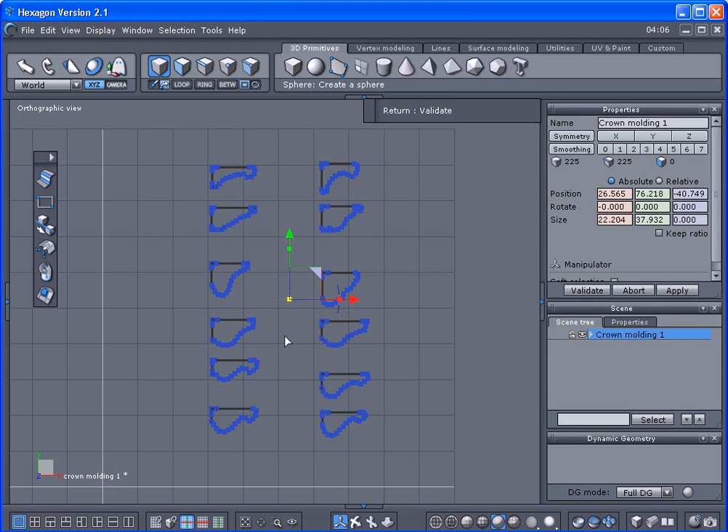What I have here is some 2D profile shapes of pieces of trim. As you can see, I've got some profile shapes made with the 2D line, and this is called crown molding, which is a piece of trim.

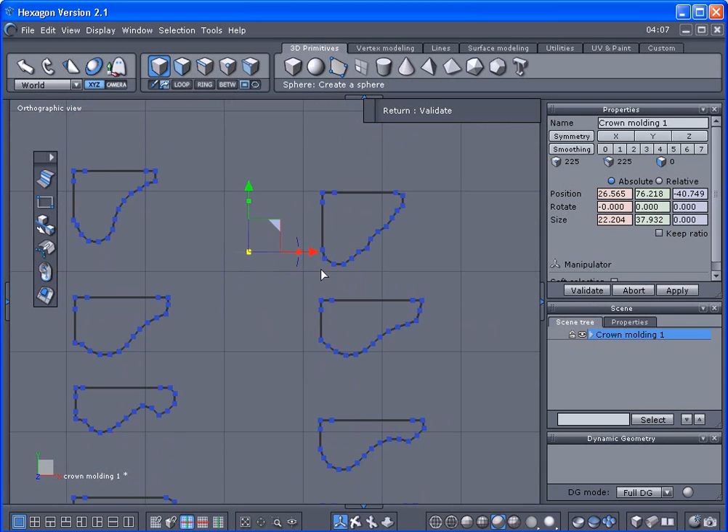Alright, I'm going to start off a little slow here and show you how these were kind of made. Then we're going to get into some fundamental stuff here in a little bit.

As anybody knows, crown molding is a piece of wood, and these are made from profile shapes of pieces of wood. Now these were not just slapped together. These profile shapes come off a blueprint.

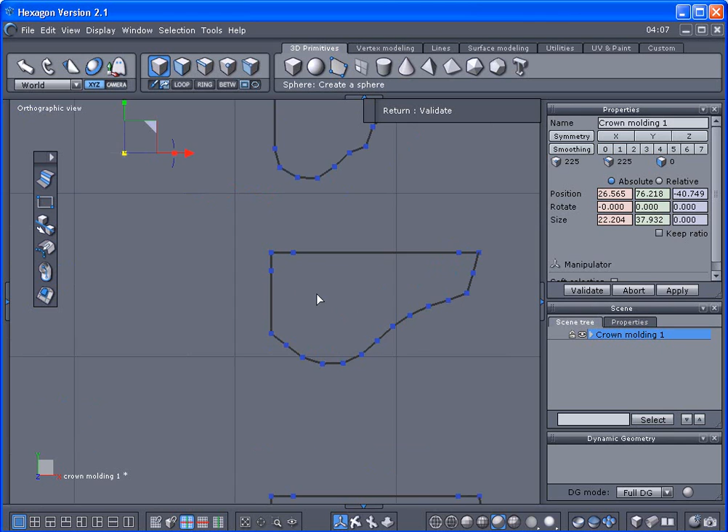So these took a little time to make, and at one point in time these points were all evenly spaced around the profile shape. I make a point of making my points all evenly spaced because I think it produces better geometry, especially when subdividing it.

But then again, we don't need the points when they're not needed, because all you do is add more points, that's more polygons you add. And we don't want to add too many polygons if they're not necessarily needed.

So anywhere there's a flat spot and there ain't no curvature, we really don't need points in between, because that's going to produce more polygons which we don't need. Over here on the side, it's flat, so there ain't no curvature, we don't need no points in the middle.

Now we got this corner point here, and I got 2 points next to it. If these 2 points weren't here next to it and I subdivide it, this thing would really make a big curve here, and I would not maintain the corner shape. So that's why these are kind of like little helpers to help maintain the shape.

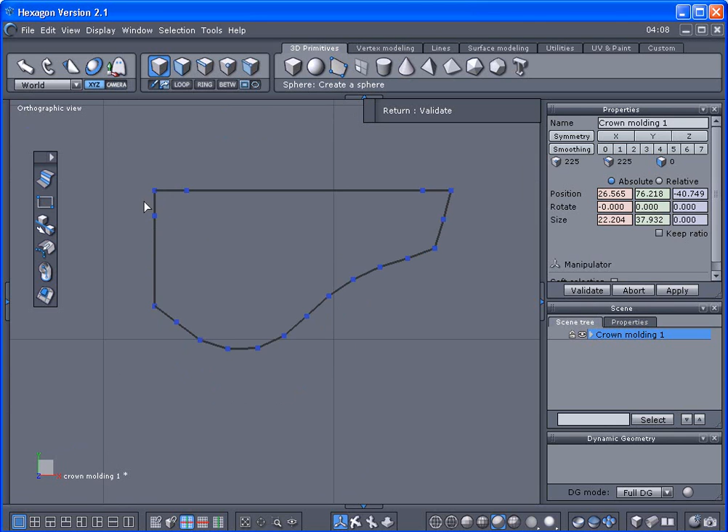And of course, then we got this curvature of the profile shape here that makes up the molding shape. I could have made it smoother by adding more points, but that's going to be up to you to do. And you don't actually have to add points to make it smoother, you just do it by subdividing it.

So what I did is I had them all evenly spaced to produce good geometry, but at the same time I tried keeping the least amount of points while still helping maintain the shape. And that's going to produce low polygons. Then it's up to you to subdivide it to make it smoother, like I said earlier.

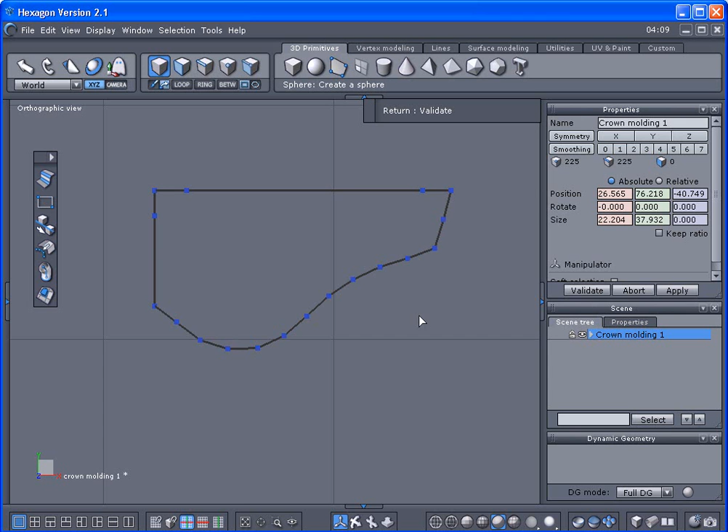Alright, with that said, these come in as groups. Over here, all you do is click the arrow, and you can see they're all highlighted. I'm going to deselect by double clicking. As you can see, I'm in selected object mode, and if I try selecting one, what happens? They all get highlighted. And it's going to be hard to select one by name because they're all different names.

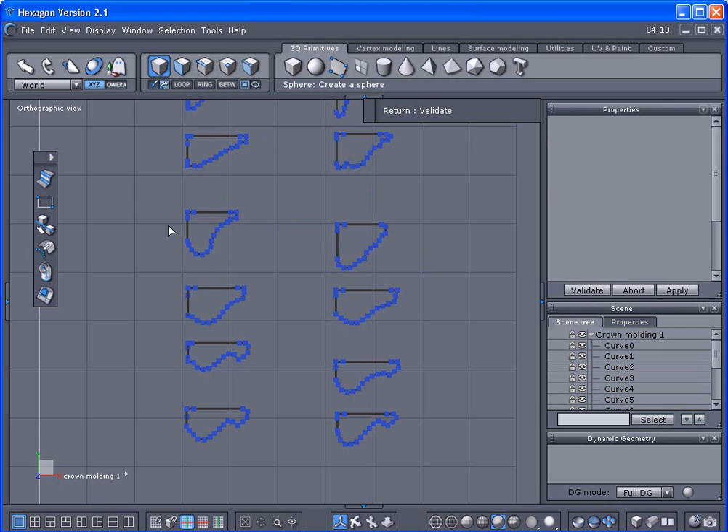So what you do, instead of clicking on the name itself, it does not matter what you pick, there's a little hash mark here, this little line, just click on it, it does not matter which one. Then you can single click to select certain ones you want on the screen, or in the viewport. Now I'm going to deselect here again. If I try selecting one, it's going to happen again, so just come over here, select one on the little line, and just single click.

Alright, I'm going to select this one here, Control C and Control V this. Then I'm going to go ahead and collapse this back up and hide this.

Alright, let's go into the top view, and we're going to try centering this up a little bit here for you. And of course, we need to go into perspective view here.

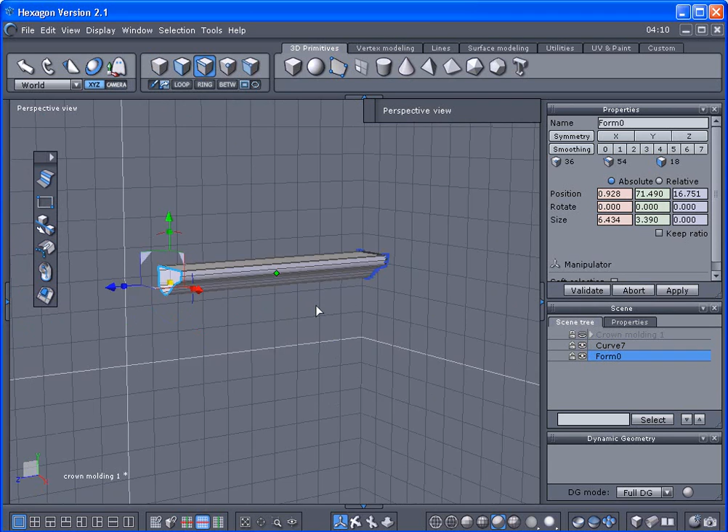Then I'm going to go ahead and hold the control key, and I'm going to drag this out. Now here is your piece of trim. It's fairly smooth, and I kind of like that.

But if I wanted to make it smoother, what you would do is subdivide it first. I could cap the ends on it right now, but if I did that and tried subdividing it, this is what's going to happen, so we don't want to do that.

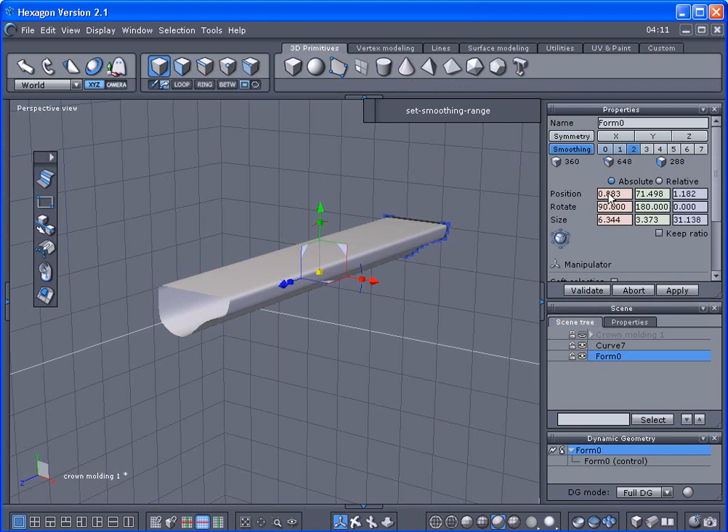We're going to Control Z this a couple times. What we're going to do is subdivide it first, collapse to DG, then we're going to go ahead and cap the ends on there. As you can see, now I got a nice smooth piece of molding there.

Alright, we'll scoot this to the side, and this is from the original one here. Now if these points weren't on here, like I said earlier, we'll go ahead and hit the backspace on here to remove these.

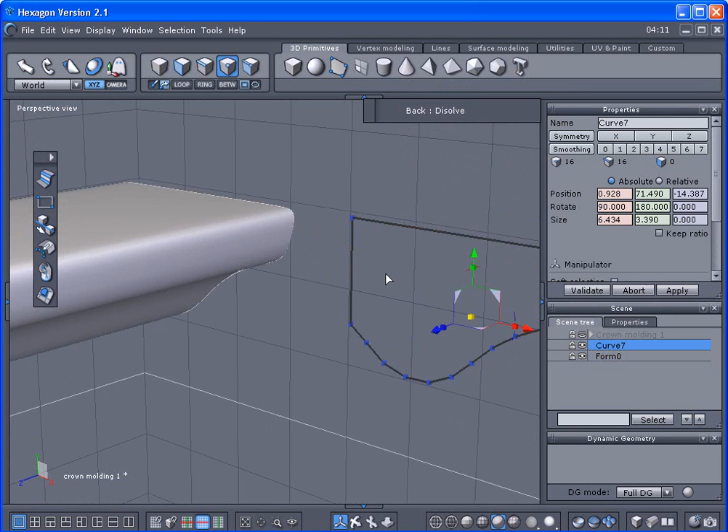And if I extrude it and subdivide it, as you can see, the two points in the corner were helpers to help maintain the shape. So that's what the two points are there for. Anyway, I'm going to pause the video and we're going to go into the next step.

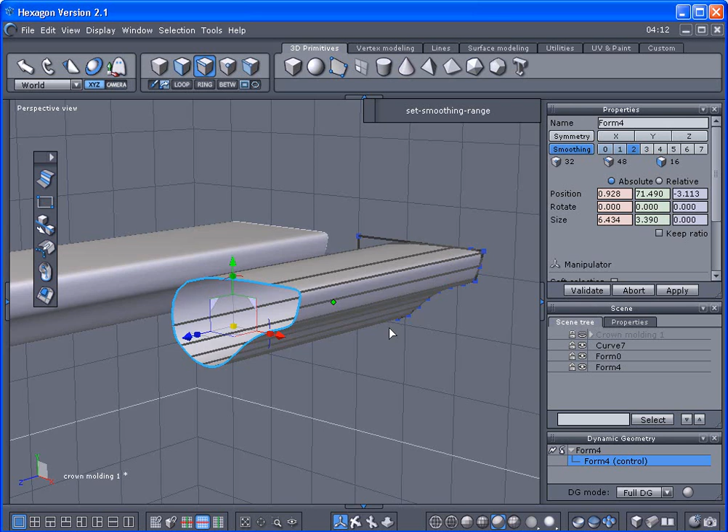Alright, I'm going to select these over here and we're going to delete these. Let's say I'm working on a project and I want to load one of the trim packages up. What I would do is go to File, Import, not Open, because if you press File, Open, it's going to delete your project here. We want to import, and I'm going to go to Trim Package 1, and that's going to load that one in and merge it to the scene.

Now if I wanted to add another one, we do the same thing, File, Import, and I want to do crown molding 2. The free ones you're going to get are for crown molding 1, and the other ones here for crown molding 2 come with the HXM bonus pack. So we'll import that, and there's our extra set right there. If for some reason we want to load both at the same time, we could just go ahead and choose File, Import, and use crown molding 1 and 2. These are the combinations of both of these together, and we can do it that way.

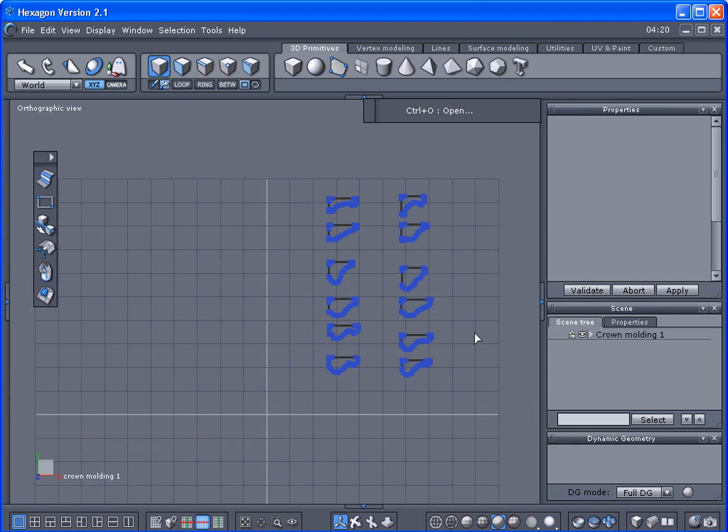And like I said, if you was to go ahead and use File, Open, what's going to happen is it's going to delete everything out of your scene, and if you got something going, it's going to remove it, and you might not want that to happen. So if you want it to merge, just use File, Import.

Alright, I got some profile shapes of some baseboard here, as you can see right here. On the left hand side is the flat spot where the baseboard meets the wall, and on the right side is the profile shape of the baseboard on the outside. And if you recall earlier, I said anytime there's a flat spot or non-curvature, you don't need as many points. But on this one, I left points on the outside because these points can be edited to the geometry later, since this is where we want to edit on the outside. We don't want to edit on the inside by the wall.

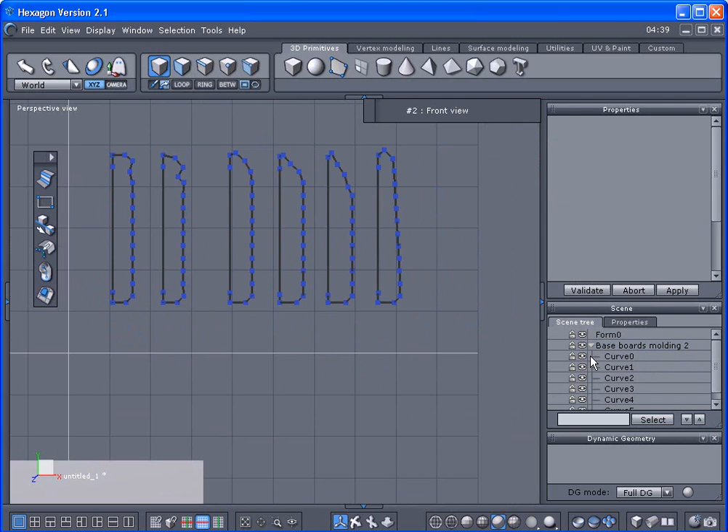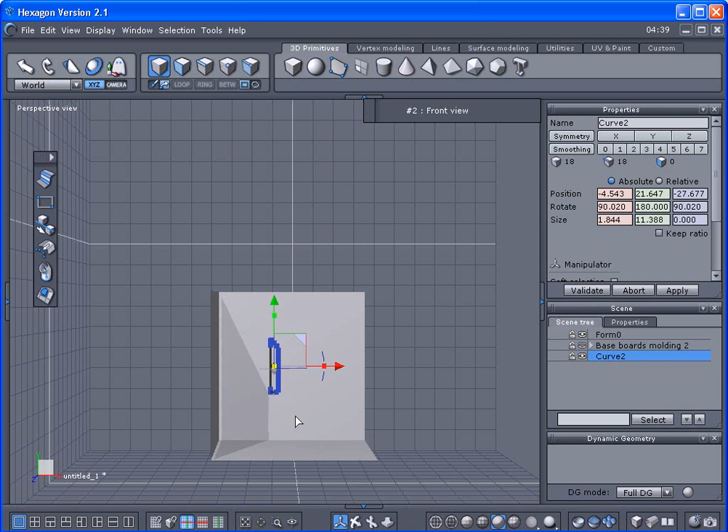So with that said, we'll just go ahead and select one of these, and I'll choose this one here, and Control C and Control V it. We'll go ahead and hide these other ones here. We're going to go into the front view, and we're going to bring this in, and I got this box here. It's going to resemble the inside of the wall here. I knocked out a couple of the walls so you can see through it.

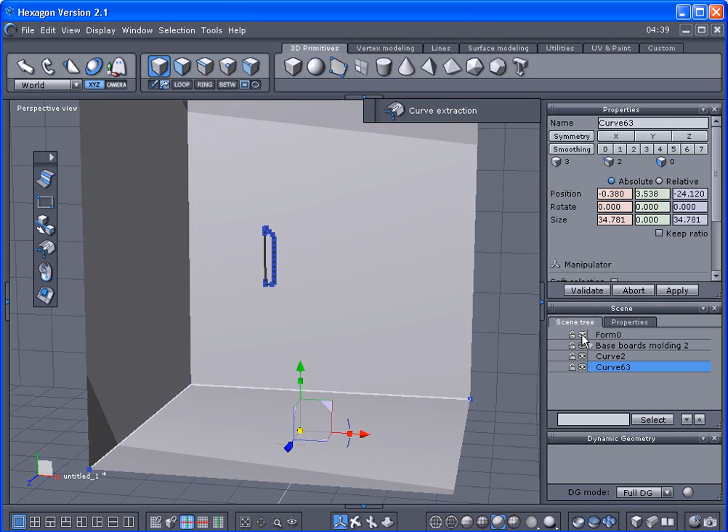What I'm going to do is select this box here, or the wall, and select a couple edges, and we're going to use curve extraction. I'm going to go ahead and hide this wall for right now. And here's the profile shape. Now we want the flat spot towards the wall. I usually just hold the shift key and snap. If I snap down here, you can see it snaps to the line, or the center line.

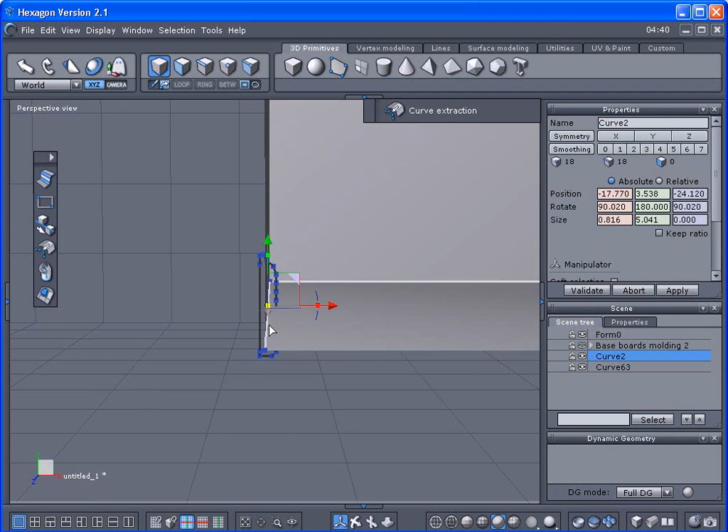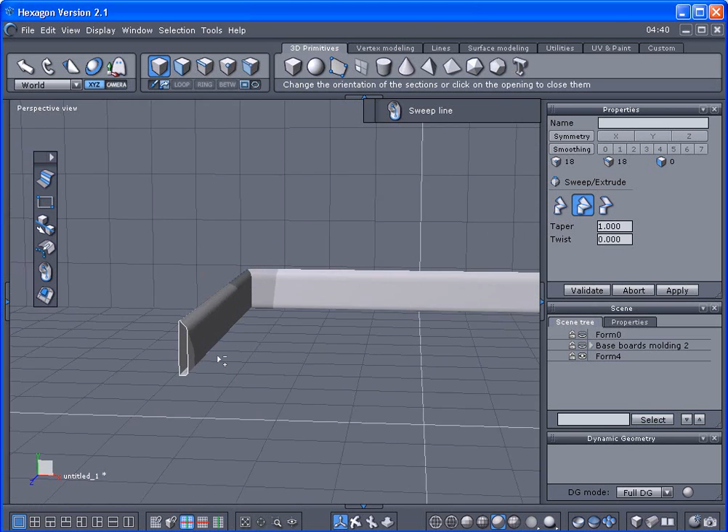If I unhide the box here, I want to make sure my profile shape's a little bit smaller than that. I don't want my baseboard that big. Anyway, with that said, we want the flat spot toward the wall, so as soon as the profile shape is selected first, then we're going to select a sweep line, then select the line here. Now you can see that the flat spot went like it was supposed to, and you can cycle through here to straighten it back out if there's any kind of mess up. Sometimes that flat spot will not always go on the outside, and it'll work just backwards. So what you'll have to do is bring the profile shape over on the right hand side.

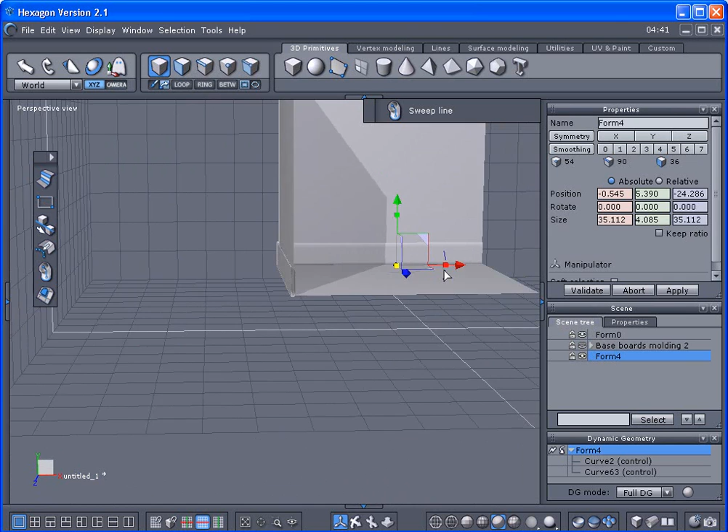Alright, we're going to go ahead and unhide the room here. As you can see, now I have to scale it, and it's kind of sticking out inside the wall. Then I have to do this little tweak in here, then it's going to come up short on the room. So there's another way we can go about doing things instead of just one way. So what we'll do is just go back to the whole thing again.

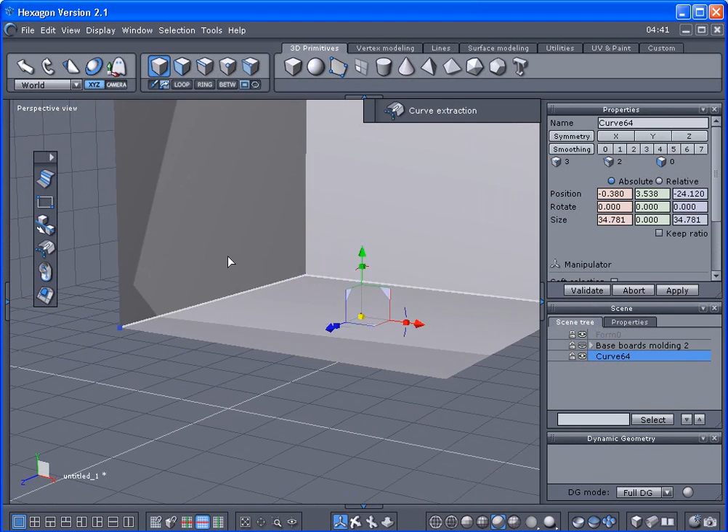Use curve extraction. We're going to go ahead and lock the box so we can't select it. Since I already have a copy of this, Control V, I'll use a copy of the shape here. I'll bring it down, hold the shift key, at least it gets me down in the area where I want to be at. And we're going to scale this down to the approximate size of some baseboard.

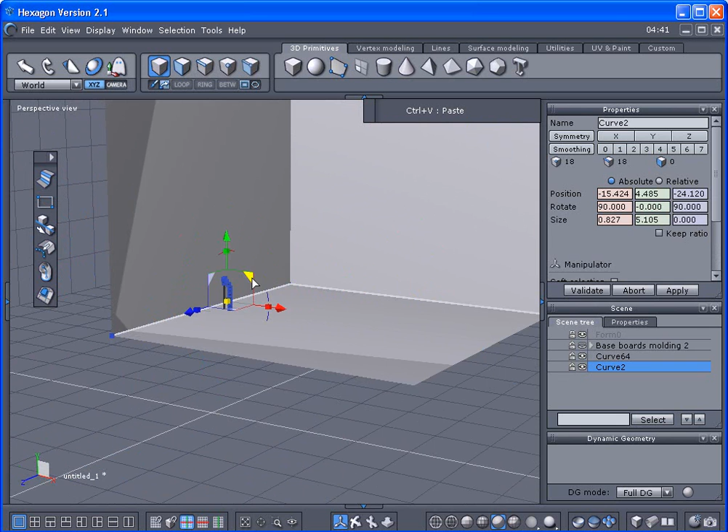And like I said, sometimes you have to swing it to this side if things don't work. So I know it works on this side, so I don't have a problem.

So I'll just come over here, and I'm going to use Snap Align. As the profile shape is selected, I'm going to use Snap Align, select the point on the baseboard, then select over here.

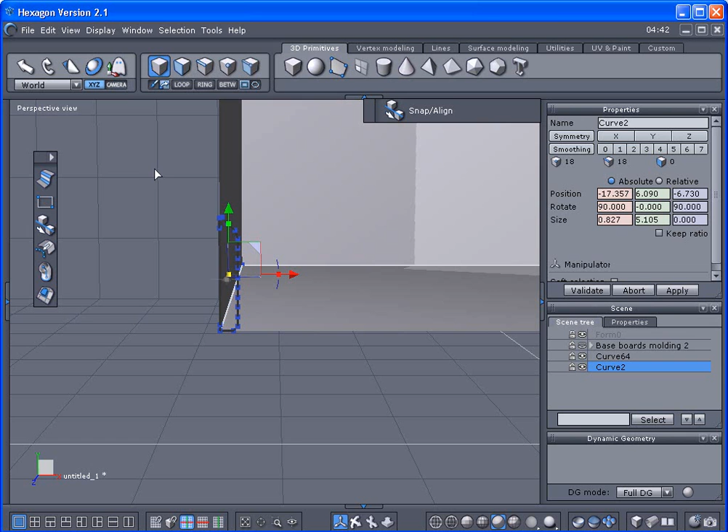And when I'm in selected object mode, I just select the sweep with the profile shape selected first, then select the line. Of course, cycle through here to straighten it back up.

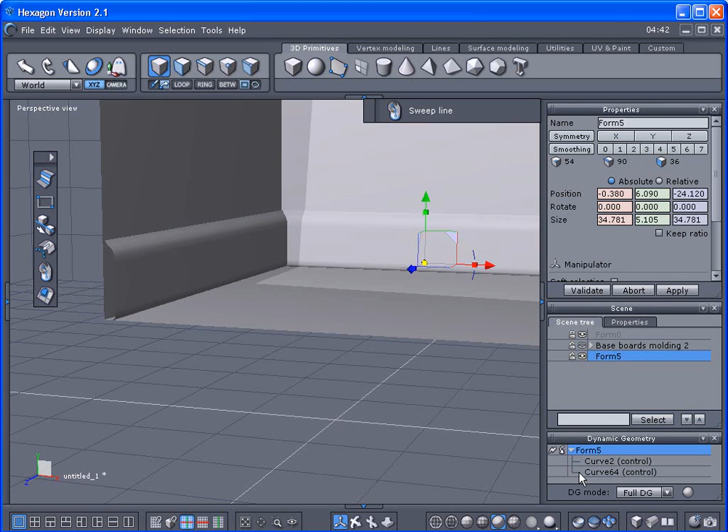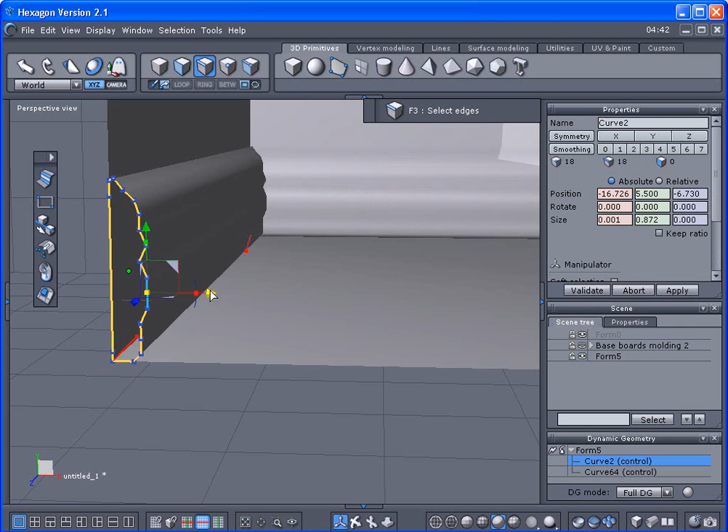And we're going to go ahead and validate that. And we're going to select the object, and we're going to select one of the curves here. There's the original curves. And remember these points on the side that I said you could edit? Well, you can actually take these points and you can pull on the mesh to edit it. You can also do the edges too if you want. I'll select multiple ones and pull out.

And you can edit it that way. I always make a habit of collapsing the DG. Then we're going to go ahead and close this. As you can see, there's our new piece of baseboard.

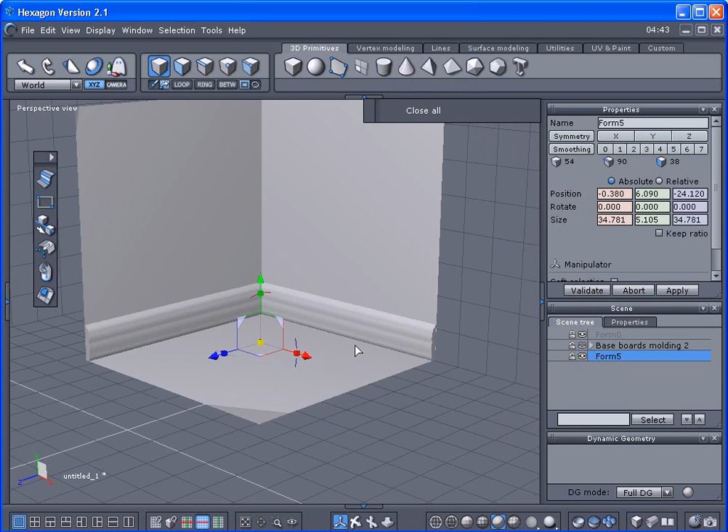Alright, I'm going to pause the video and go into the next section.

To speed things up here, I just loaded another project with basically the same method when you're doing a piece of crown molding. As you can see here, I got profile shape, and I'm going to connect it to the line here. We're going to select the profile shape, snap a line, select the corner point, and select here.

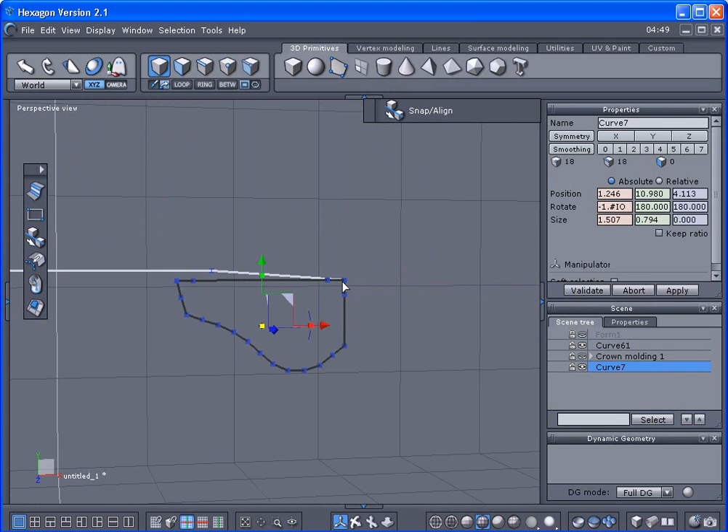And we're going to go ahead with the profile shape selected, then select that, the sweep line, then here. And I like to cycle through here because it seems like it straightens it up. And we're going to go ahead and select the object, collapse the DG, and we're going to go ahead and close the ends on this.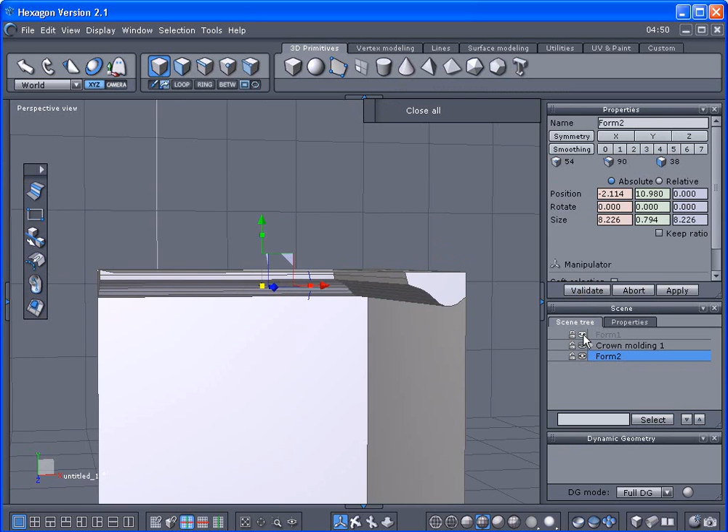Let's unhide the form here. As you can see, there's our piece of crown molding.

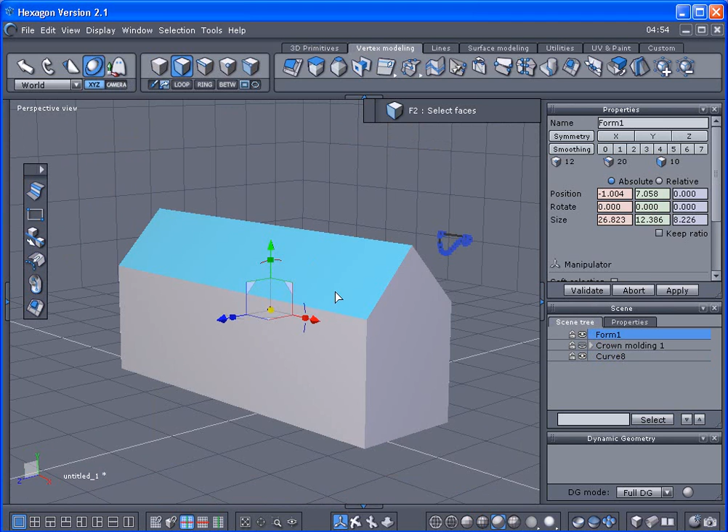Alright, I'm going to use this piece of trim on this barn looking shape here. And we're going to select the edge here. Shift select both of these. Go to the selection. Convert faces, borders to edges. And we're going to use the curve extraction once more time.

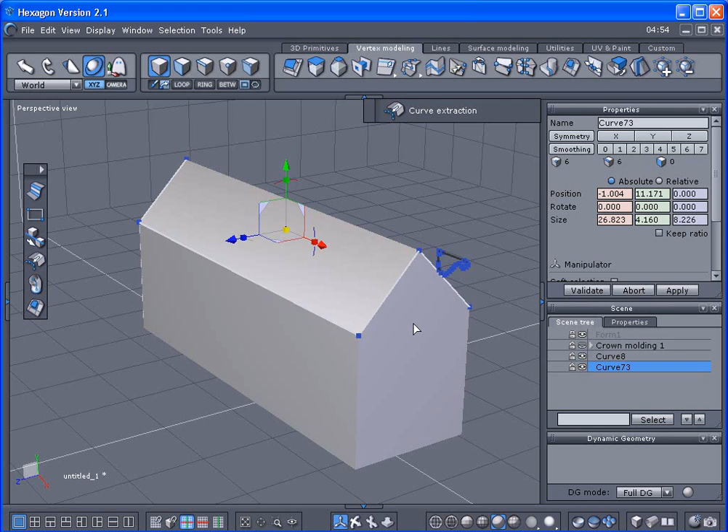And we're going to go ahead and lock this so we don't select the barn. Now here's the profile shape.

Now a lot of times I like just to hold the shift key and just snap to a point somewhere in the center. This is something you can experiment with later, or you can do the snap align like I said earlier, like you can just snap to the point here to here. It's something you can experiment around with.

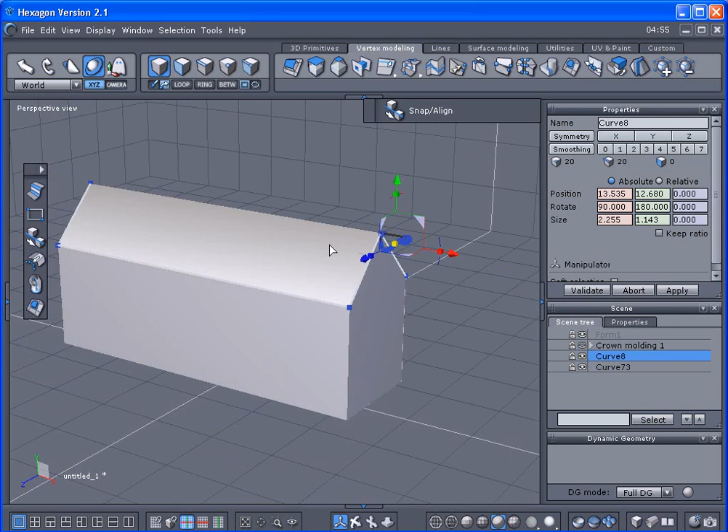And also you can just take this, and sometimes you might want to move it over here in the center and just turn it this way. It's just something you're going to have to mess with, but just keep it somewhere centered or on the line somewhere. So we'll just go ahead and bring it back over here. Hold the shift key, and we'll just bring it around.

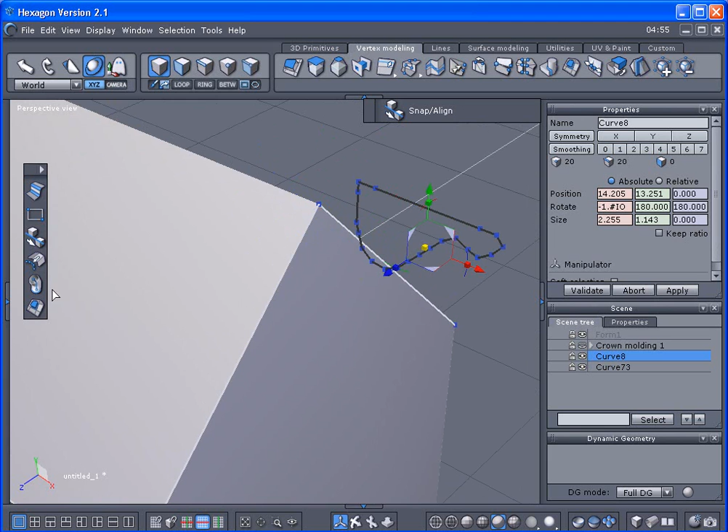Hold the shift key. Let's try, I'll just go ahead and let's do the snap align on this. So I'll go ahead and select here. Alright, with my profile shape selected, I'm going to go ahead and use a sweep line and select the edge here.

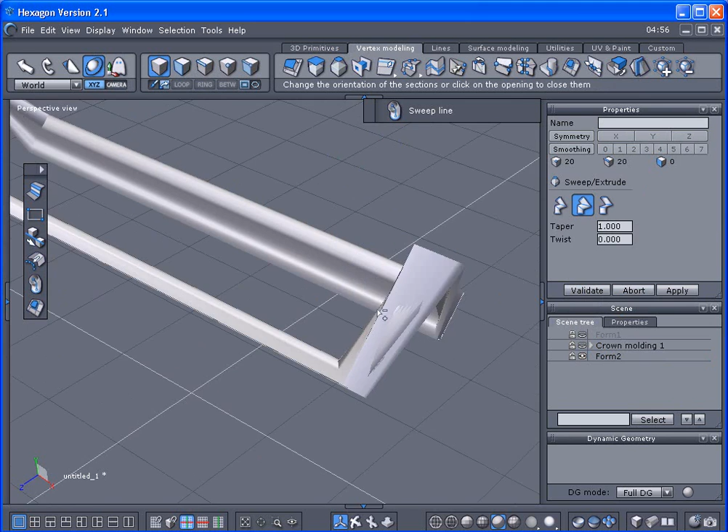Let's go ahead and hide this here and let's take a look what happens. Alright, let's try this again. As you can see, it looks kind of messed up. That's why I said you got to cycle through these over here to straighten it back up. As you can see, now it's straightened itself back up.

So this is something that you got to kind of mess with. Alright, let's go ahead and let's undo that. This time we'll just bring it up here and snap it to the center. That means where the profile shape center is at is snapping to the center point where I'm pulling it to.

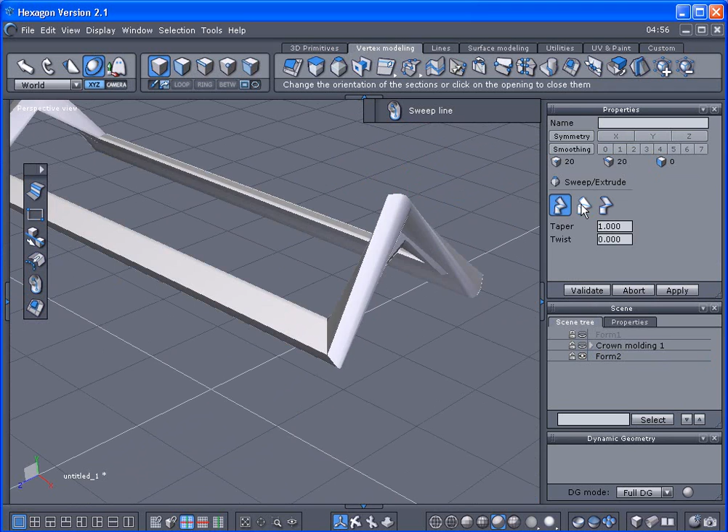Well, at this time here, I'll go ahead and do the sweep line again, and we'll cycle back through these again. We'll turn this back on, and we get different effects.

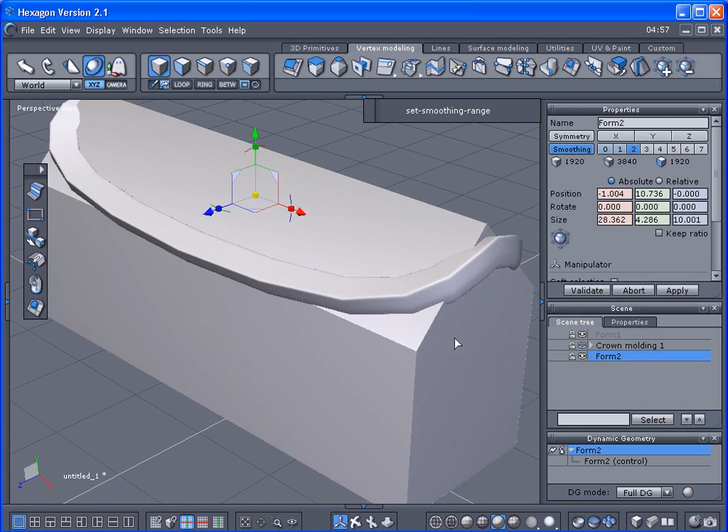Alright, I'm going to go ahead and validate this right now, and I'm going to go ahead and collapse DG, which is common for me to do. But when I subdivide this thing, as you can see how the edges folded up like that. Well, we can fix that.

I'll go ahead and go into edge mode so we can see a little bit better. We're going to go ahead and select a few of these edges here.

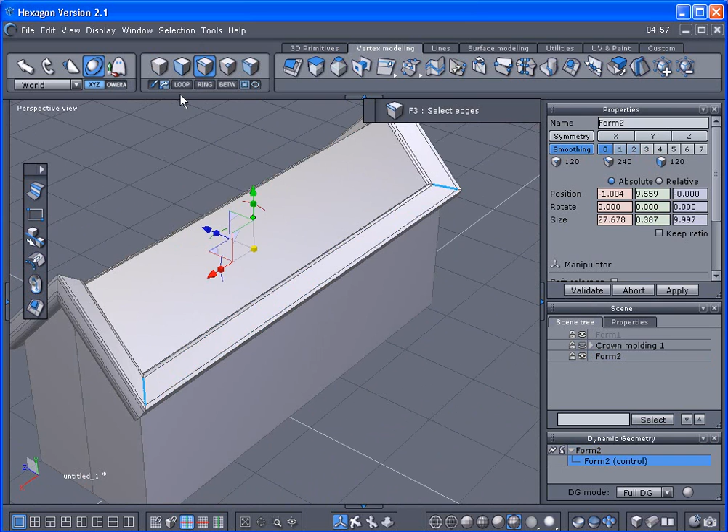I'm not going to select the peak right now, I'm going to go ahead and loop these, and we're just going to use the chamfer on this. I'll leave this at default and see what it does. Collapse DG, then when I subdivide it, you can see the edges stayed at the bottom, but at the top it's curving around.

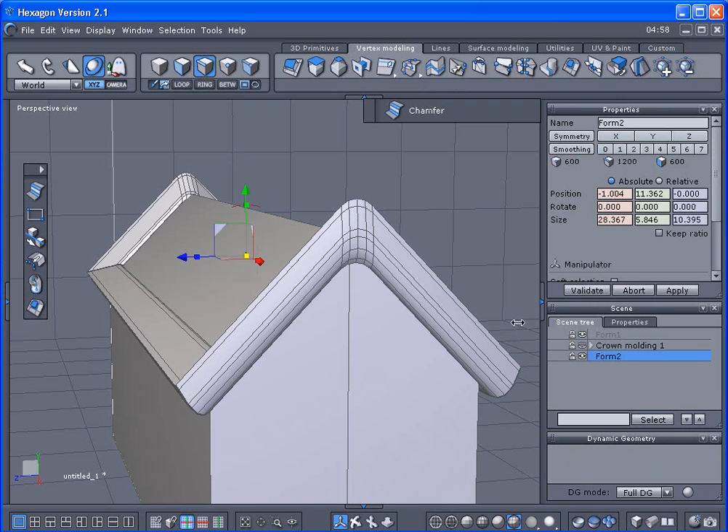I could have chamfered these, but this one I want a little more rounder, so I'm going to go like this and loop this. I'll use the chamfer, but this time make it something a little different. When I subdivide it, you can see it still held the shape without folding up. That's just another way you can use this piece of trim, on the outside or inside, it'll be fine.

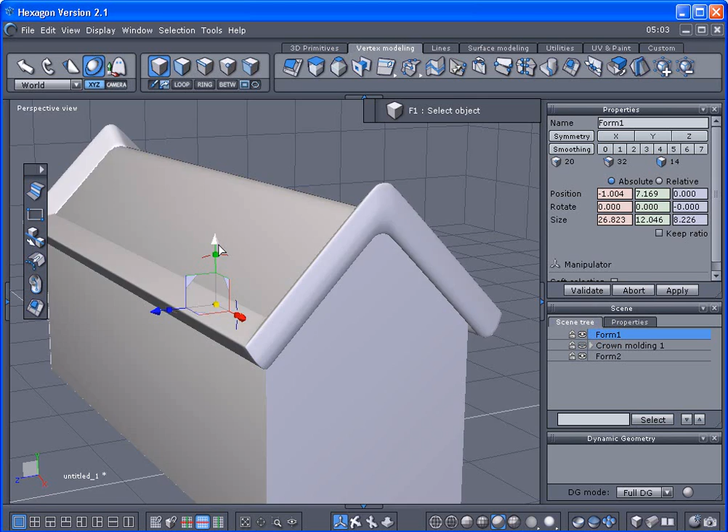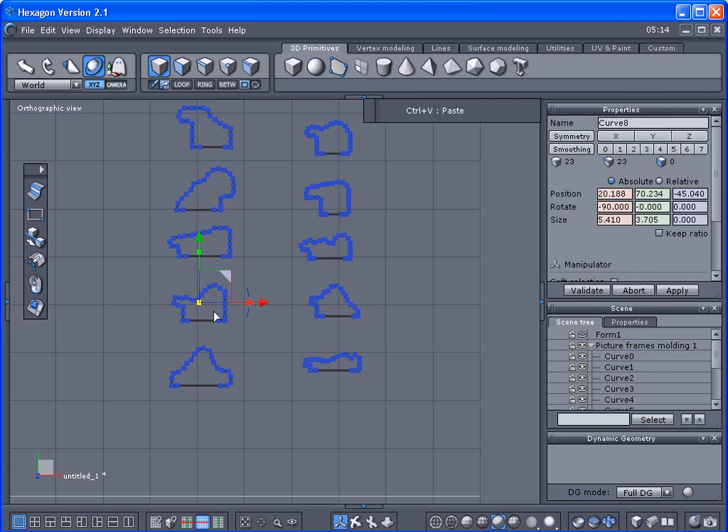Alright, I got one I call picture frame molding. This isn't like a picture frame for pictures, though you could probably make it for that, but this is for woodwork, for putting picture frames around paneling or maybe a door, so door panels. We'll select one of these, and I kind of like this one, so Control C, Control V, and hide that one. This is going to be our fake wall for right now, a piece of paneling or sheetrock.

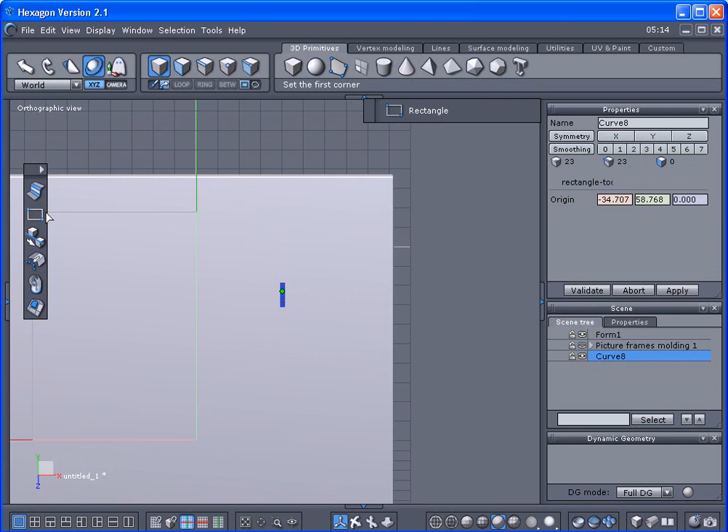I'm going to turn this not parallel, but perpendicular towards the wall, and I'll use this rectangle, hold the shift key and snap to a point right here, and try drawing out a frame here, and scale this down a little bit here. I kind of like that.

We'll go ahead and make another copy of this, Control C, Control V, and we'll do one for the bottom here. You've probably seen this in a lot of houses with paneling, it kind of gives the picture frame look around the paneling.

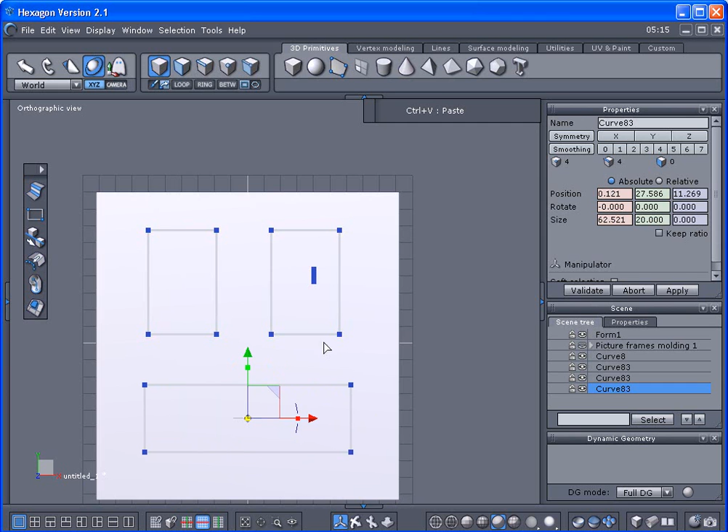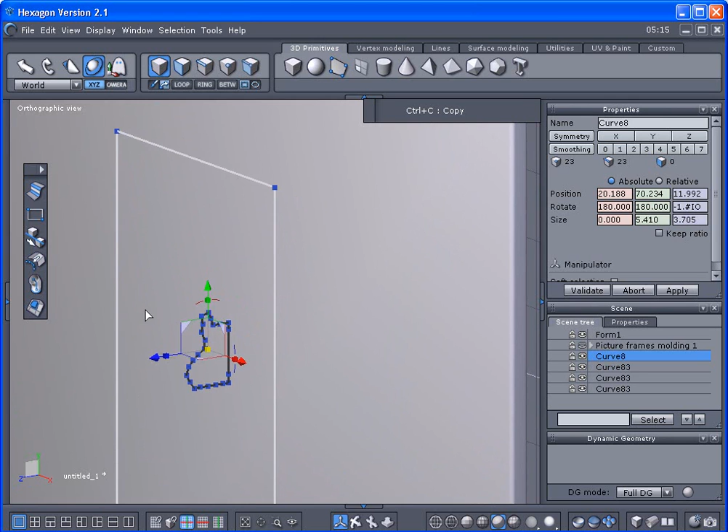Alright, we're going to select back up here. Now we want to make the flat edge towards the paneling, so we'll tip it up like this. I'm going to use snap align, and first get a copy of this because I'll be using this a couple times. Control C, and I'll try centering this one right here, see what happens. We'll lock this so we don't select the wall, and let's see what happens.

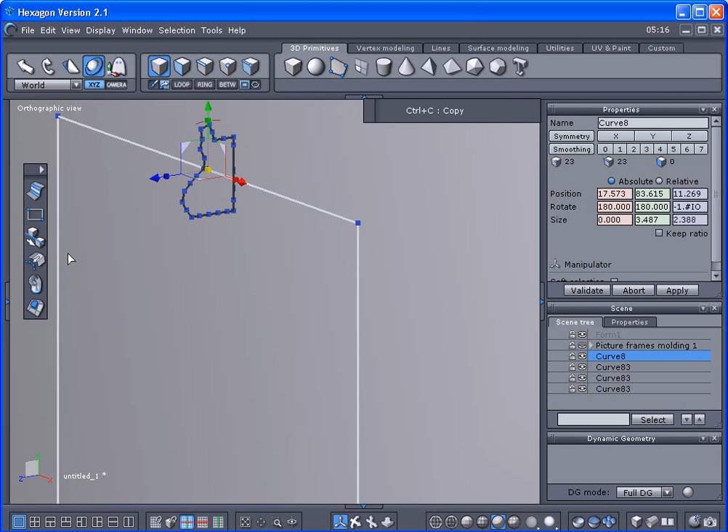Let's scale this down a little bit, it's still a little too big, so I'll recopy this right here again, Control C, so we can copy that same size. With the profile selected first, then we'll select the sweep.

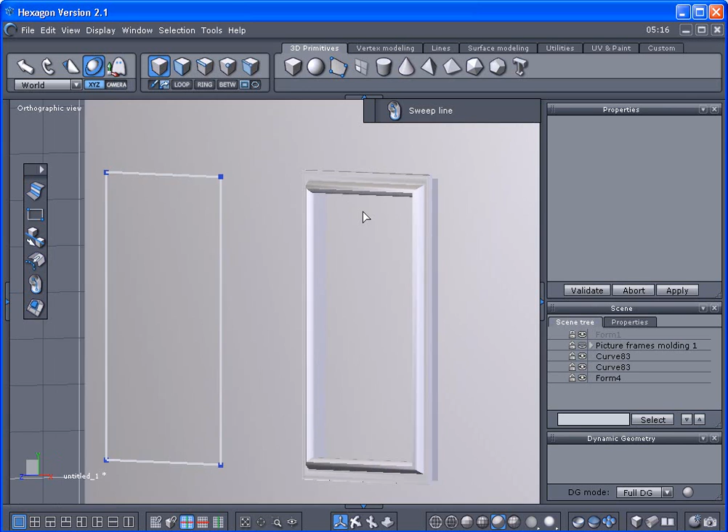That's not too bad, I kind of like that. We'll cycle through here to straighten that out. I could make copies of this one and just do it over and over again, but for this sake we're just going to go ahead and...

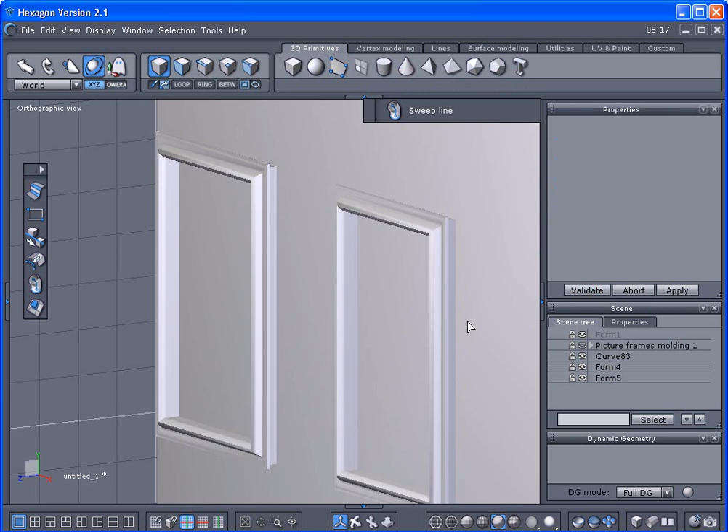Bring another copy over here, hold the shift key so it snaps, we'll repeat this again. Validate it, Control V, drag it down, hold the shift key, and we're going to do this again with a sweep. Always cycle through it even though it looks good.

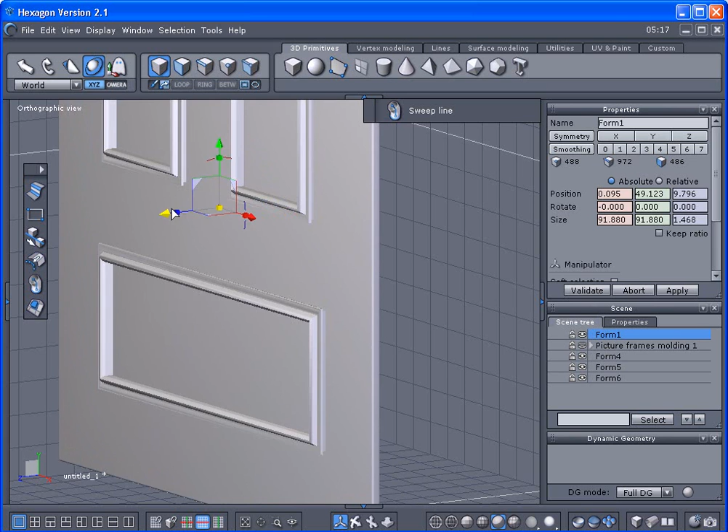I'll make it where I can select this paneling, and bring this paneling in just a little bit. This could almost resemble a door, you can do high-raised door panelings this way also.